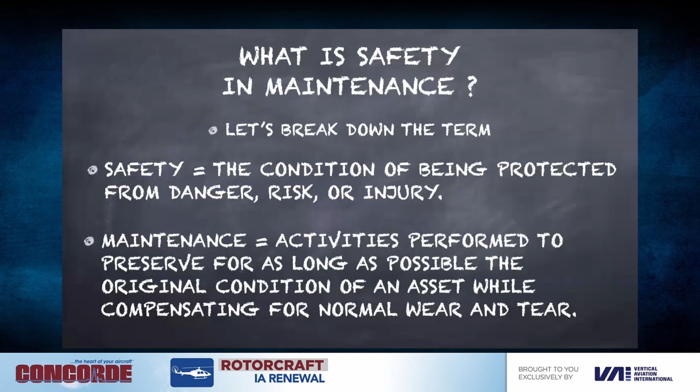So what is safety in maintenance? Let's break it down. Safety equals a condition of being protected from danger, risk, or injury. Maintenance are the activities performed to preserve for as long as possible the original condition of an asset while compensating for the normal wear and tear. All right, pretty simple, right?

So who's responsible for the safety of this particular aircraft? Well, you've got a couple of people. These two handsome devils here are responsible for the maintenance side of it, but these folks are responsible for the flight safety of themselves, their helicopter, and their passengers. So it's a joint effort on how we manage safety.

Responsibilities. Let's see what the pilot's responsibilities are. Your job is to apply your pilot skills such that you complete the mission and you, your passengers, and your aircraft return safely.

For the mechanics, our job is to apply our skills such that your aircraft performs as designed and you, the pilot, are able to complete the mission safely with confidence, about the operation and safety of the aircraft. You have to be confident that what we've done will keep you in the air. As you really don't have time, while you're flying, to wonder what we did in the maintenance department. It needs to operate as advertised.

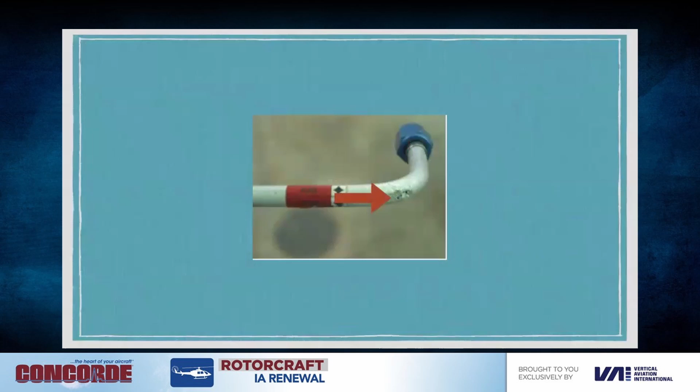A pilot should not be the one to find this during pre-flight, or worse, to find it by accident. That'd be a wear on a fuel line. That would not be the way we should do it. That's the mechanic's job.

So what is communication exactly? Communication is the imparting or exchanging of information by speaking or writing and using some medium to successfully convey an idea or a feeling. This is a skill that is learned, believe it or not. We have to learn how to communicate properly, both verbally and in writing. And I will give you some hints here as we go along.

Effective verbal communication: engage eye contact. Make sure that the person you're speaking with, whether a single person or a group, has eye contact with everybody. Make it conversational, clear, concise, and connected to the subject at hand. And of course, make it correct. And you ask questions at the end to make sure that the people are getting what you're saying.

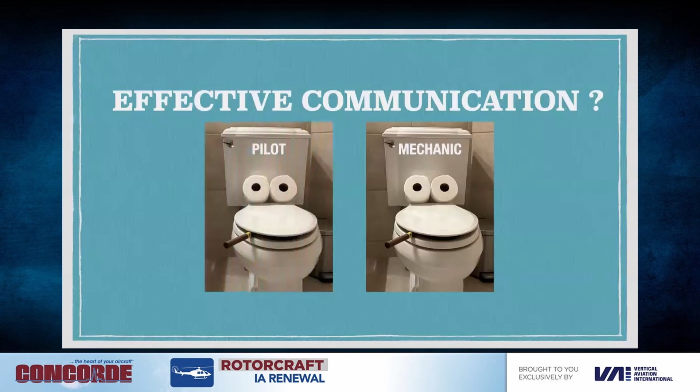So let's talk about effective communication between a pilot and a mechanic. Now, the mechanic has their own ideas sometimes about what they think the pilot is full of when trying to communicate with them, and the pilot has the same idea. However, they're both incorrect. They're just two different ways of thinking based upon their personalities and the way that they communicate. So we should learn how the other communicates so that we can do it effectively.

Pilot and the mechanic, output, input. The thing that we're looking for is rapport. We're trying to get a rapport between us so that we can get problems solved. We need to be talking with each other, not at each other.

So how does the mechanic react? The mechanic is an introverted thinker. We deal with scenarios methodically. We have a compelling drive to understand the way things work, which causes us to think and ponder a lot of problems - troubleshooting. We have a lot of natural ability that makes us multi-talented while confidently managing the issues at hand. We have the opportunity to do that when we're troubleshooting.

We're happiest when we're dealing with action-oriented tasks that require detailed, logical analysis and technical skills. We absorb large quantities of impersonal facts, and by sorting through the information, make decisions. We have that capability, and we have that opportunity.

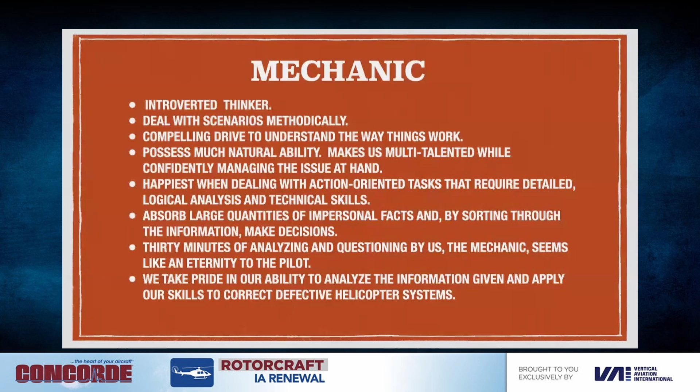Extroverted thinkers live in a world of facts and concrete needs, value competence and efficiency, generally take charge and are assertive people, self-confident and aggressive, can be exacting and express themselves without reserve, deal with all scenarios instantly and systematically. Decisions must be made immediately. They want hard facts, concise data, condensed and to the point.

And of course, 30 minutes of analyzing and questioning by the mechanic seems like an eternity to the pilot. They have a clear vision of the way things should be, constantly evaluating their personal environment to ensure all is running smoothly and systematically. They make decisions instantly - that's the way they have to do it as a pilot.

So how do we as pilots and mechanics achieve effective communication? We respect each other's profession. We remember that we are both professionals. We remember we both want the same outcome, a flyable, safe aircraft.

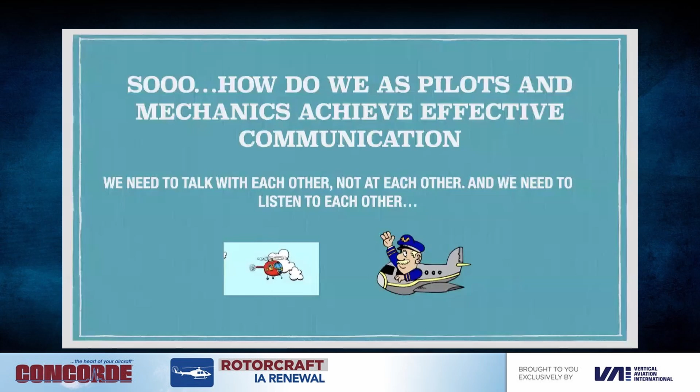We need to talk with each other, not at each other, and we need to listen to each other.

So let's go through a scenario of troubleshooting. This is when we do the most exchange with the pilot, that and just prior to a pre-flight. The pilot is our best tool. We need to recognize that. He or she, the person behind the controls that flies it every day, they get to know instinctively what's right and what's wrong and where things should be.

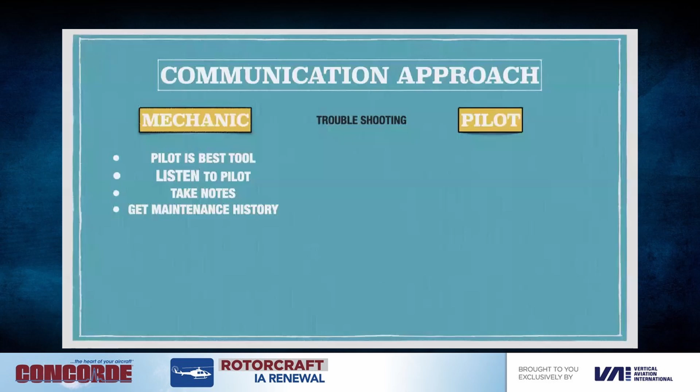We need to listen to the pilot. We need to take notes. We need to get a maintenance history, make sure we've got that in front of us. And we need to ask direct questions. Take a flight if we can, if it's safe enough, and be patient.

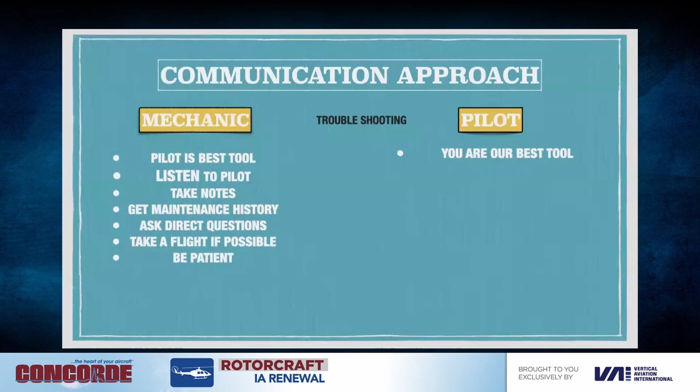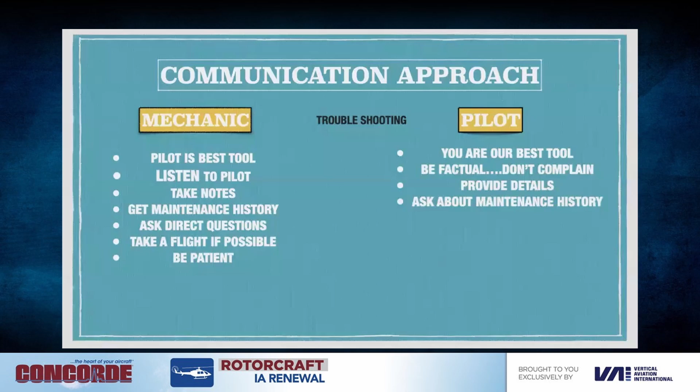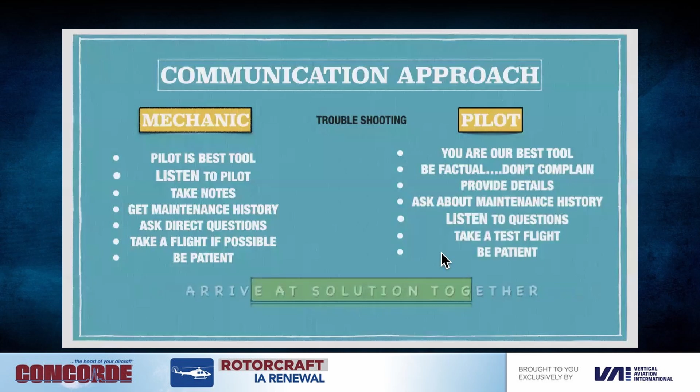Pilot, remember you are our best tool. So the information you give us is straight, cannot be thought of as complaining, but needs to be factual. Be factual, don't complain. Provide details. Ask about the maintenance history. Listen to our questions and take a test flight if we can do it. And of course, be patient. And we will arrive at a solution together to figure out what the problem is and get it fixed.

So let's talk about post-maintenance inspection and a pre-flight. Same thing, pilot is the best tool. We leave the aircraft open wherever we inspect it and wherever we work so that the pilot can see exactly where we've been and what we've done. Ask them to inspect our work.

Share the inspection information, share what we found while we were doing the maintenance. Have the maintenance history handy. Answer their questions concisely. Take a test flight. Note the changes that the pilot has noticed on the aircraft, whether it was in for routine maintenance or it was in to correct a problem.

Still, you are our best tool. Use a flashlight and details. Pay attention to what we're showing you. We're showing you where we've been, and we want you to be comfortable with the work that we've done.

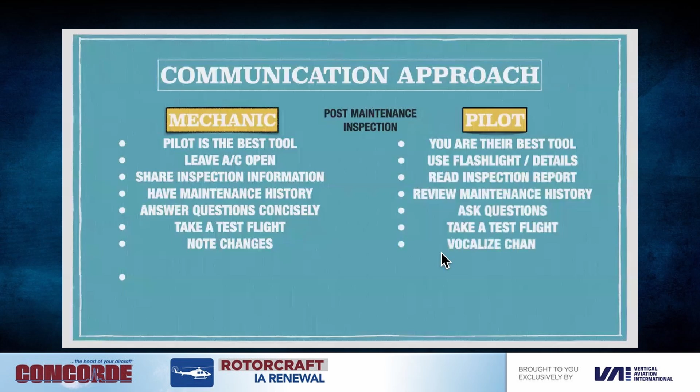Read our inspection report and ask questions. Review the maintenance history. Ask the questions. Take a test flight. Vocalize the changes that you note in the aircraft from the time you flew it before. Release the aircraft to service together.

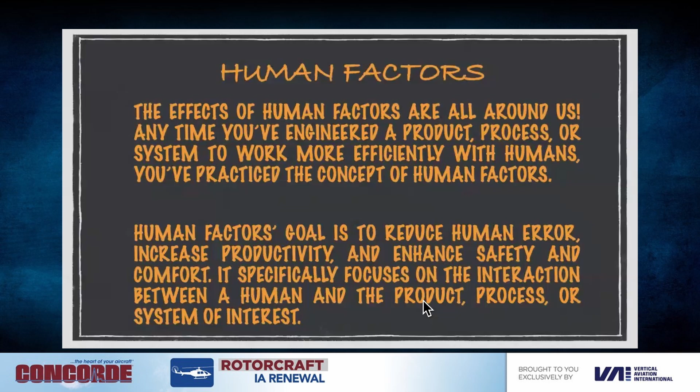So human factors. The effects of human factors are all around us. Anytime you've engineered a product, process, or system to work more efficiently with humans, you've practiced the concept of human factors. Human factors' goal is to reduce human error, increase productivity, and enhance safety and comfort. It specifically focuses on the interaction between a human and the product, process, or system of interest.

Human factors and maintenance resource management. Human factors is the conceptual knowledge of human psychology, the study of social and personal skills involving psychological and physical abilities. Maintenance resource management, MRM, is the practical application of that knowledge. Keep this in mind.

So are accidents the result of human factors? Nope, not the case. Is this human factors? No. This is human failure that caused this accident. It's human to make mistakes. Recognize that. Mistakes are the result of negative influencers affecting our performance.

Failure and success result from the same mental processes. Think about this. No matter the job, we will experience success or failure. That's your choice. You only have two options. You'll either do it correctly or you'll do it as a failure. Because aviation is unforgiving of human error, we cannot allow mistakes to capture and erode the safety of our system.

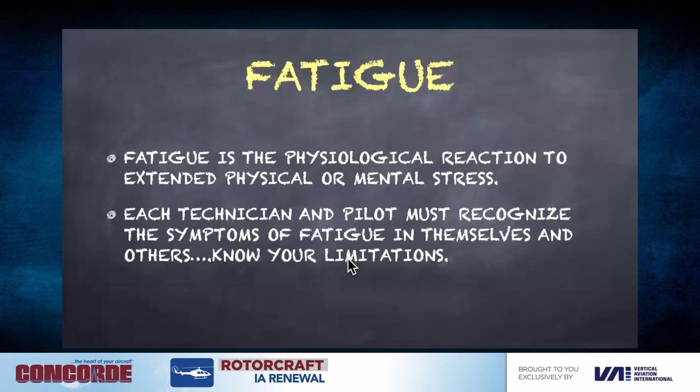Each technician and pilot must recognize the symptoms of fatigue in themselves and others. Know your limitations. Complacency, and I feel this is

probably the major one of the 12 things that affect our behavior and are supporters of the others. It's a feeling of self-satisfaction accompanied by a loss of awareness of potential dangers. While job repetition does promote efficiency, keep in mind the importance of your task.

Follow a work checklist, initial, stamp each task as you do it.

Distraction, a thing that diverts your attention from the activity, the task at hand at which you are engaged. Avoid distractions. Use checklists should you get interrupted mid-job, go back a couple of steps. If you have difficulty maintaining focus, stop, take a deep breath, and re-engage the task.

Pressure. Always put safety above meeting a schedule. Be honest with yourself. Should you see that a complicated schedule will be missed, let management know and ask for help rather than speed up your activities.

Lack of awareness. Be aware of the total job and how your actions affect those working with you. Think before you act. Stay aware of the situation. If something feels or appears off, most of the time it is.

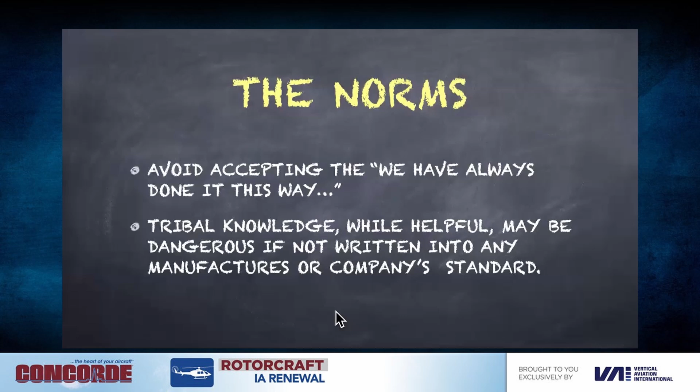Lack of teamwork. Aircraft maintenance is a group activity with individuals sharing a common goal. Each team member understands the job and agrees to the plan, allowing for a working relationship of mutual trust. Avoid accepting the 'we have always done it this way.' Tribal knowledge, while helpful, may be dangerous if not written into the manufacturer's or the company's standards.

So what happened to November 37 Sierra Hotel? An endless buffet of blunders is about the best way we can put it.

Loss of control, Sundance Helicopter, AS-350B2, November 37 Sierra Hotel. It was near Las Vegas on December 7th, 2011. This is the actual incident report by the NTSB. It's all public knowledge, and I have authorization to use it.

You will see that each one of these dirty dozen plays a part, a major part, in the cause of this accident.

So let's talk about the company. They at this time operated 22 helicopters. In 2011, they flew 31,350 tour flight hours with 50 pilots.

Sunrise to sunset, 7 days a week, 1,425 flight hours per helicopter per year, 118.75 flight hours per helicopter per month, 3.95 flight hours per helicopter per day.

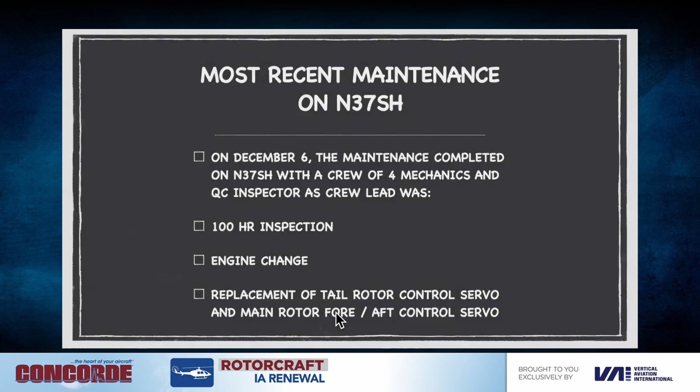Most recent maintenance on the helicopter: on December 6th, maintenance was completed on November 37 Sierra Hotel with a crew of 4 mechanics and a QC inspector as the crew lead. A 100-hour inspection, engine change, replacement of the tail rotor control servo and the main rotor fore and aft control servo.

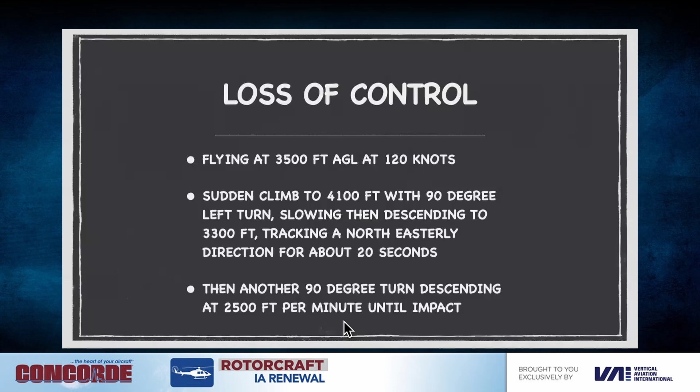Flying at about 3,500 feet AGL at 120 knots, sudden climb to 4,100 feet with a 90-degree left turn, slowing, then descending to 3,300 feet, tracking a northeasterly direction for about 20 seconds, then another 90-degree turn, descending at 2,500 feet per minute until impact.

The pilot, 31 years of age, certified since 2007 in rotorcraft and instrument, had 3,174 total flight hours, 1,360.6 PIC in this aircraft. So he wasn't a rookie. No history of accidents or violations. He was not unsafe. First day back from a 2-day furlough, should have been rested. This was his 3rd tour flight. Previous passengers felt safe and comfortable.

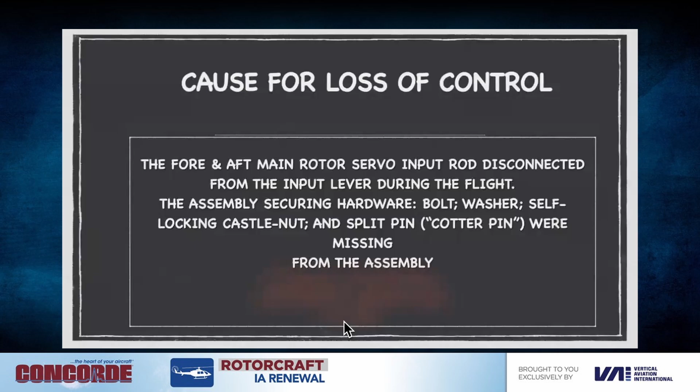Cause for the loss of control: the fore and aft main rotor servo input rod disconnected from the input lever during flight. The assembly securing hardware - bolt, washer, self-locking castle nut, and split pin or cotter pin - were missing from the assembly. None of the securing hardware were ever found.

The control rods for both lateral servos and the tail rotor servo were connected. The fore and aft servo's control rod was found in two pieces. The break was consistent with impact damage. The lower piece was connected. The bolt hole on the piece that was disconnected revealed no elongation. Keep that in mind.

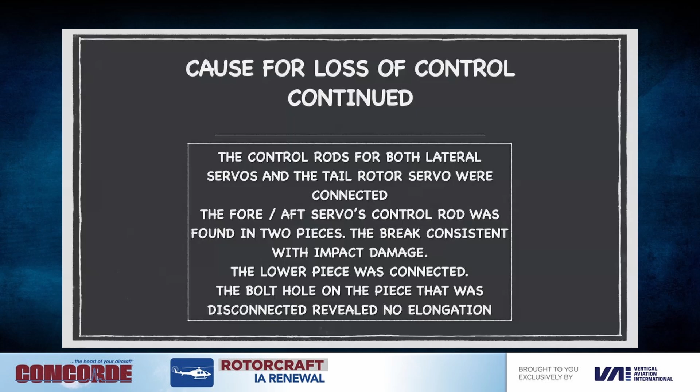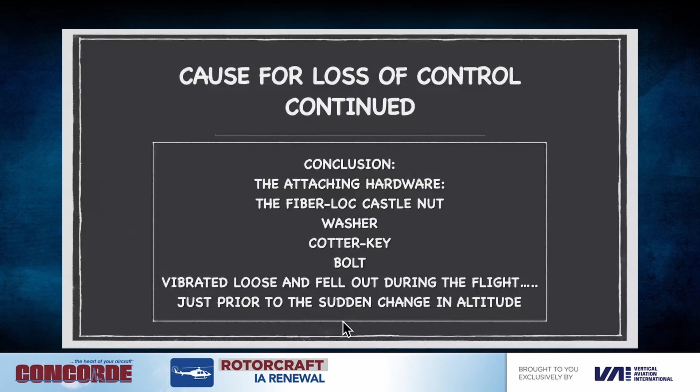Cause for loss of control: the attaching hardware - the Fiber-Loc castle nut, washer, cotter key, and bolt - vibrated loose and fell out during the flight, just prior to the sudden change in altitude.

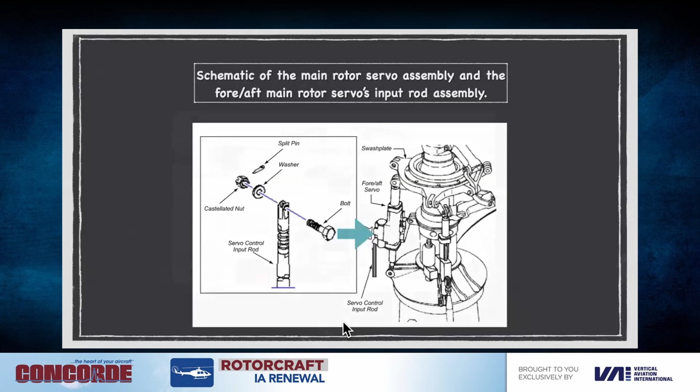This is a picture of the connection, showing the rotor servo assembly and the fore and aft main rotor servo's input rod assembly. It hooks up right there. And of course, there's a picture of the main rotor assembly. This is the nut and the split pin, and the fore and aft servo input rod connection hardware is visible through a cutout in the ice shield present on their helicopters. It's about eye level for a pilot doing a pre-flight inspection.

4 people looked at this area: the mechanic, the inspector, the test pilot prior to release, and the pilot that ended up dying in the helicopter. 4 people looked, 4 people saw that the nut was in place, but there was no cotter key.

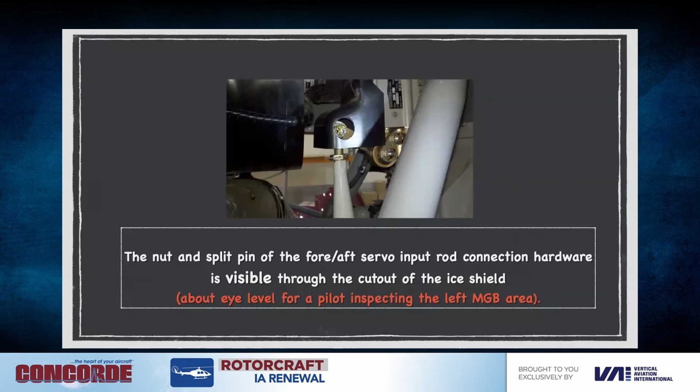There's a picture of the hardware just for knowledge so that you know what we're talking about.

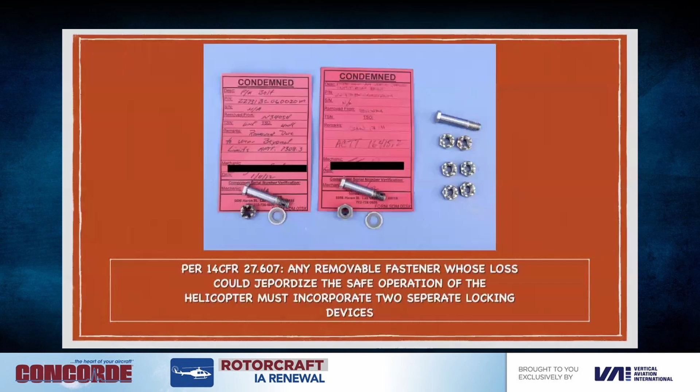14 CFR 27.607: any removable fastener whose loss could jeopardize the safe operation of the helicopter must incorporate 2 separate locking devices - a fiber type lock nut resistant to backing off, and a drilled bolt through which a cotter key can secure the assembly.

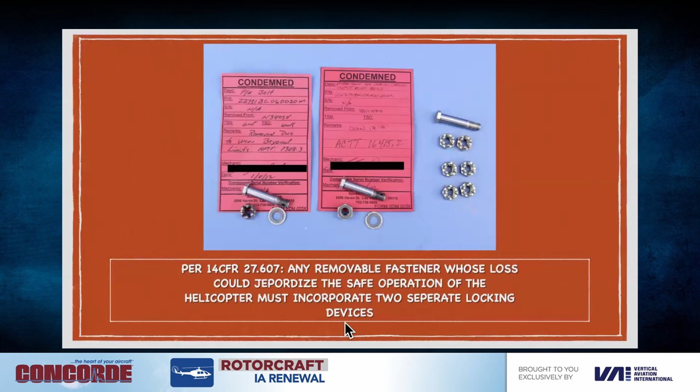Let's talk about the mechanic that did the installation. An A&P since 2008, 2 years experience in general aviation maintenance, no experience on the AS-350 aircraft, hired in June 2011. Company in-house training, OJT by the other mechanics, no factory school on the AS-350 aircraft. He had completed 6 fore and aft servo changes prior to this installation.

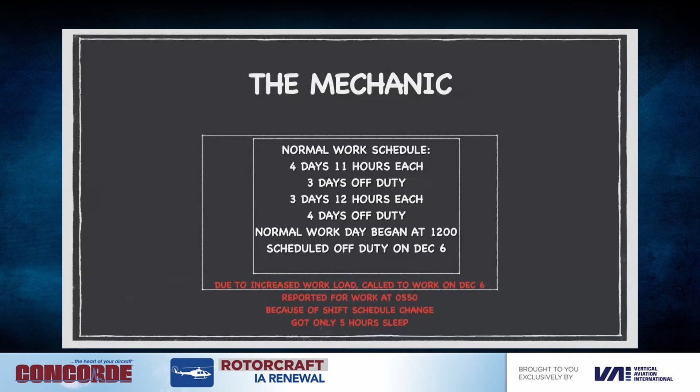Normal work schedule, and this is a pretty tough schedule: 4 days of 11 hours each day, 3 days off; 3 days of 12 hours each day, 4 days off. Normal workday began at 1,200 hours. Scheduled off duty on December 6th, but due to increased workload, he was called in early, reporting for work at 5:50 in the morning. Those weren't his normal hours. Because of the shift schedule change, he only got about 5 hours sleep.

The inspector received his A&P in 2002, QC inspector for 6 months, hired in November 2010. About 9 years prior experience in maintenance, 1 year of maintenance on the AS-350. One of 3 lead mechanics in the shop, no mention of a factory school. Normal work schedule, same as the mechanic's. Again, due to increased workload, he was called into work on December 6th, reported at the same time. Because of the shift schedule change, he only got about 7 hours sleep prior to showing up.

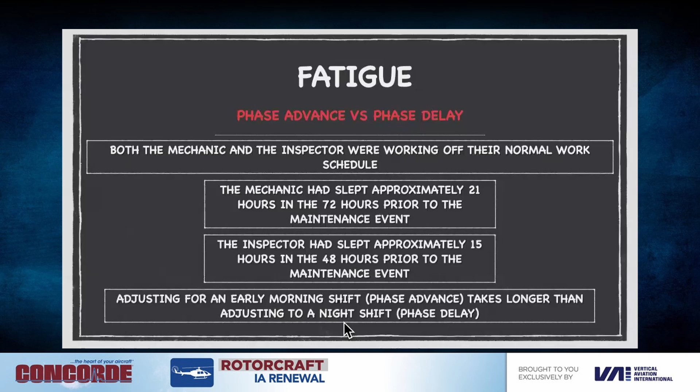There's a thing that causes fatigue, it's called phase advance, phase delay. Both the mechanic and the inspector were working off their normal work schedule. The mechanic had slept approximately 21 hours in the 72 prior to the maintenance event. The inspector had slept approximately 15 in the 48 hours prior to this maintenance event. Adjusting for an early morning shift, phase advance, takes longer than adjusting to a night shift, phase delay.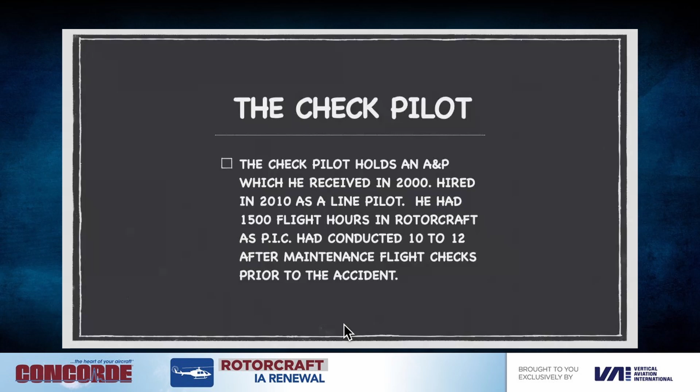Check pilot: the check pilot holds an A&P, which he received in 2000. Hired in 2010 as a line pilot, at 1,500 hours in rotorcraft as PIC, had conducted 10 to 12 after-maintenance flight checks prior to the accident. He was one of the ones that inspected the nut and bolt assembly.

So we went through some post-accident interviews. The Airbus maintenance manual has instructions for fore and aft servo removal and installation. The mechanic had completed the job 6 previous times. He was trained by another mechanic using tribal knowledge. Both the mechanic and the inspector were using an abbreviated work card. They were complacent about their job.

The mechanic stated he reused the fiber lock nut: 'We always do it this way,' as he deemed the nut airworthy after cleaning and inspection. This was their standard practice.

Self-locking nut reuse guidance: the Airbus Standard Practices Manual provides detailed guidance in section 1.4.2 on the reuse of self-locking nuts. Make sure the nylon lock is not excessively damaged. Fit the nut by hand, and if it can be tightened by hand, the nut is to be discarded. If it requires a minimum torque to retighten, then the nut may be reused. These nuts are like $50 a pop.

Self-locking nut reuse guidance: Advisory Circular AC 43.13-1B, Acceptable Methods, Techniques, and Practices - Aircraft Inspection and Repair, section 7-64, self-locking nuts. After the nut has been tightened, make sure the bolt or stud has at least one thread showing past the nut. Do not reuse a fiber or nylon lock nut if it does not meet minimum prevailing torque.

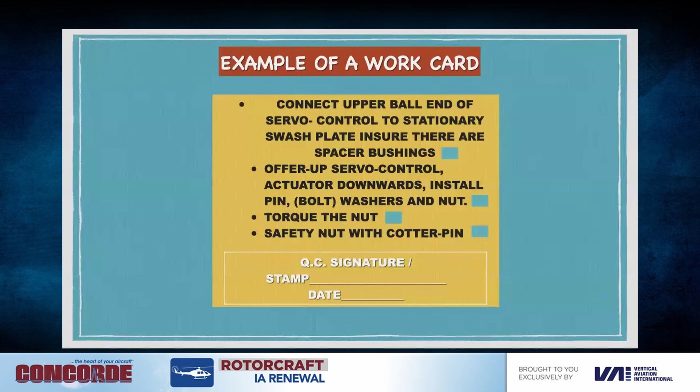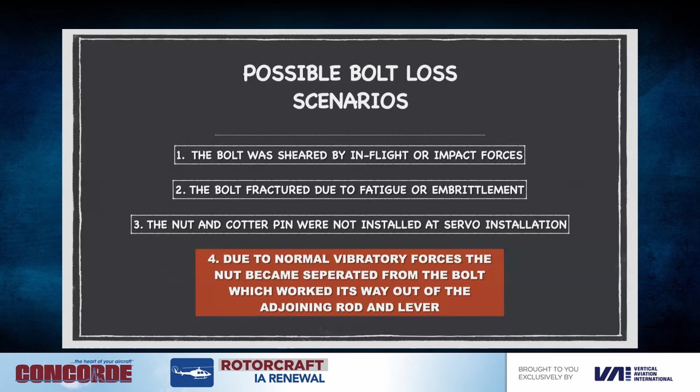Possible bolt loss scenarios: the bolt was sheared by in-flight or impact forces. The bolt fractured due to fatigue or embrittlement. The nut and cotter pin were not installed at the servo installation. Due to normal vibratory forces, the nut became separated from the bolt, which worked its way out of the adjoining rod and lever. That is the cause of the accident.

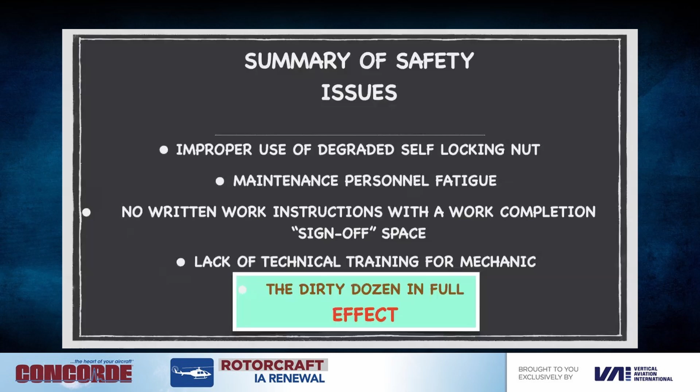Summary of safety issues: improper use of a degraded self-locking nut, maintenance personnel fatigue, no written work instructions with a work completion sign-off space, and lack of technical training for the mechanic. The Dirty Dozen in full effect. Complacency was at the bottom of all of these, supporting all of these factors.

Lack of communication, complacency, lack of knowledge, distractions, lack of teamwork, fatigue, lack of resources, pressure, lack of assertiveness, stress, lack of awareness, the norms - all because of complacency.

So let's talk about attitude. You've got a crummy attitude and you've got a good attitude. How do you tell the difference? You can tell by the use of this acronym. I bet you never thought that FINE was really an acronym. Let's show you how it works.

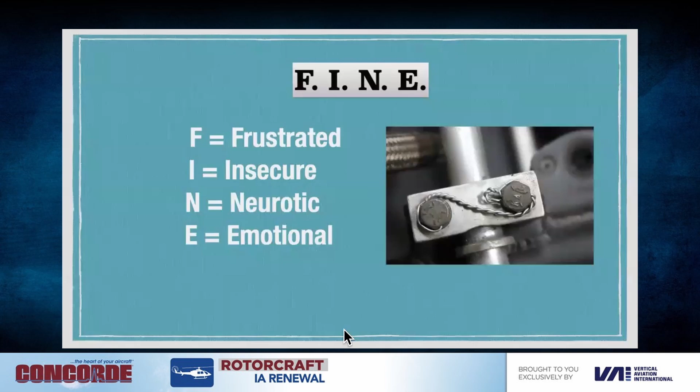With a bad attitude, if I ask how you're doing and you say fine, that means frustrated, insecure, neurotic, and emotional. However, if I ask the question and you say fine, that means first rate, invulnerable, normal, and even. So depending upon how that question is answered, this acronym can indicate your attitude for that particular day. This is definitely somebody who answered the question fine - not so much the guy that did this one. Keep that in mind when you're talking to your fellow mechanics or pilot, just how they might answer that.

Complacency, I've talked about it all through the presentation, a feeling of self-satisfaction accompanied by a loss of awareness of the potential dangers.

Levels of complacency. Generally aware but relaxed. Activities considered routine. Basically ready for the unexpected.

Unexpected event. Chaos. Complacency is man's biggest weakness as it creeps up upon us when we least expect it.

So how would you like to be just about to go under and the doctor that's about to operate on you gets a phone call? Bad enough that he would get the phone call and accept it by the nurse, but you overhear this conversation just before you go out. Oh, sure, I'm free after work.

Our problem-solving brain power processes include understanding the situation, deciding what is important and its options, recalling the pertinent data, preventing extraneous thoughts. Interruptions take brain power. Brain power to actively monitor these systems takes energy. Mentally, we struggle to ensure the consistent flow.

Chaos. All right, the end is here. You've been patient, and hopefully you appreciated what we've shared today. Hopefully got some good information that you can take back to work and help you in your daily tasks.

Remember the rules of aviation. Keep calm, aviate, navigate, but mainly communicate.